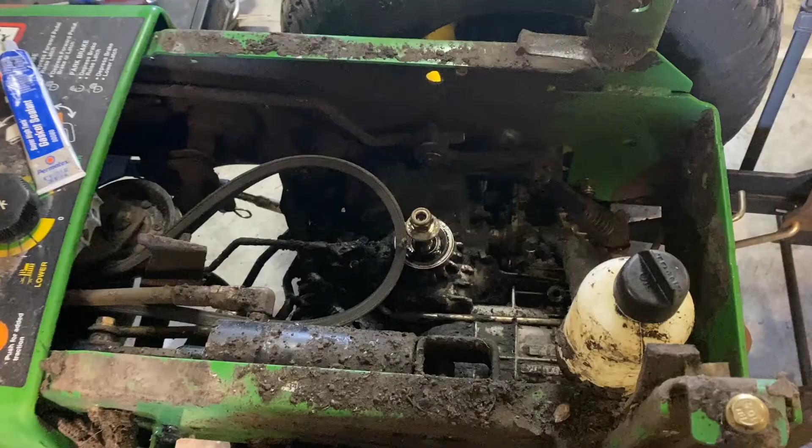Today we're working on a GX345. We did a service on this 345, including a new filter here, as well as the filter down there. We got them covered in sawdust now, but here's the old filters we took out. And when we went to fill up the reservoir, boy, it started leaking everywhere. And what we found was that this seal here on top had failed.

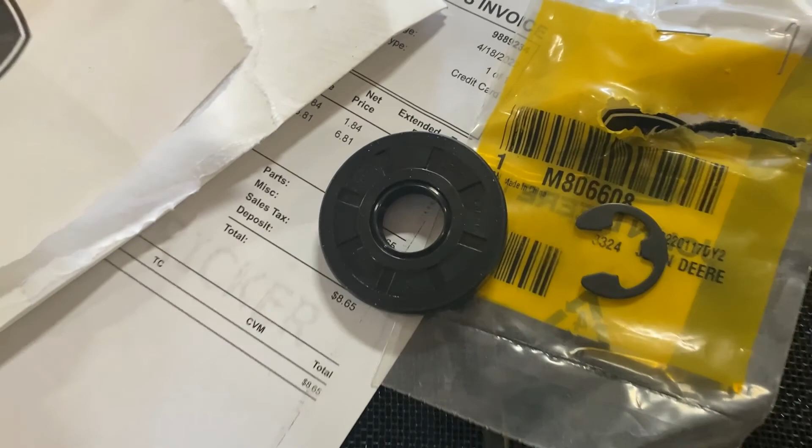So we're gonna replace that seal. I'll show you how we go about that. What we've got here is a new seal, and it was also missing the snap ring that goes above the seal. We'll replace both of those. To remove the old seal, we're going to use an assortment of tools, and I like to use a little bit of gasket sealant around the outside of the seal whenever I put it in.

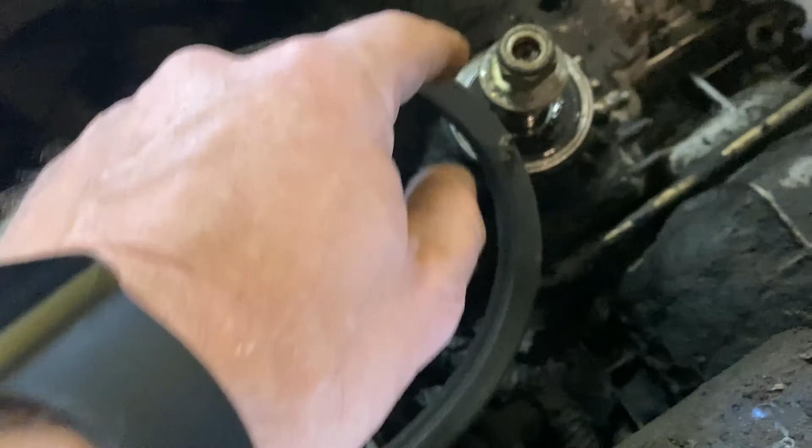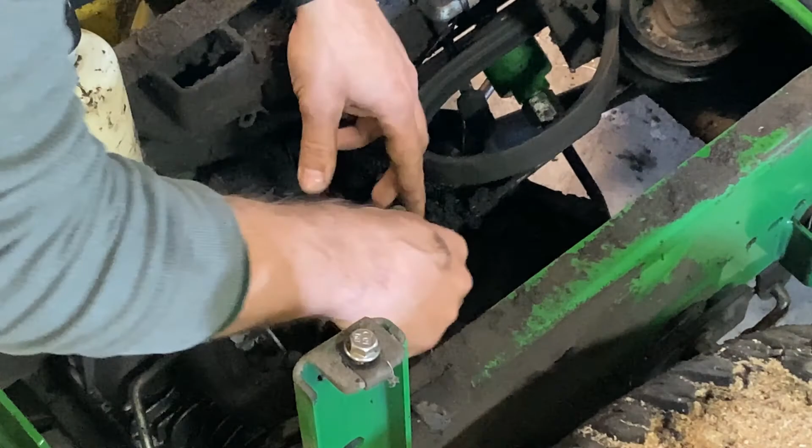Need to remove the nut and the washer. The snap ring was already missing from this one, so we don't have to worry about taking it out. There's the seal. Came out pretty easy. We've got some debris in here. We want to make sure we get all of that out. We got the spring and all that stuff. So there's that.

Everything else looks okay. I'm gonna want to take a rag and just clean all that out. I want to make this area as clean as I can before I put the new seal in.

After we get the new seal in, I'm going to pull this dude outside and power wash all this gunk out. Someone clearly knew that it was leaking, they kept refilling it and it kept leaking out. There's so much residue on here. The problem with all this residue building up is that we've got these fins. You see these fins on these transmissions like this.

What they're designed for is to increase the amount of surface area that the transmission can cool down from. So whenever you cover up all these fins, they get all filled with gunk. The transmission isn't able to cool as effectively. Same goes with an air-cooled engine or anything like that. So it's good to keep your transmission clean on the outside, even though it is just a lawnmower.

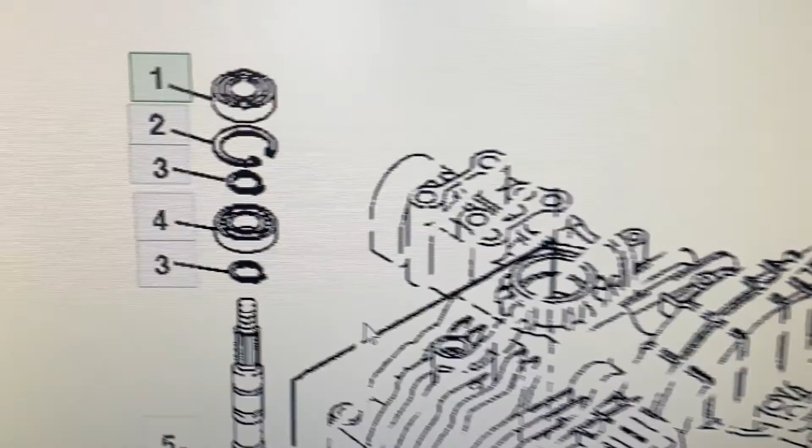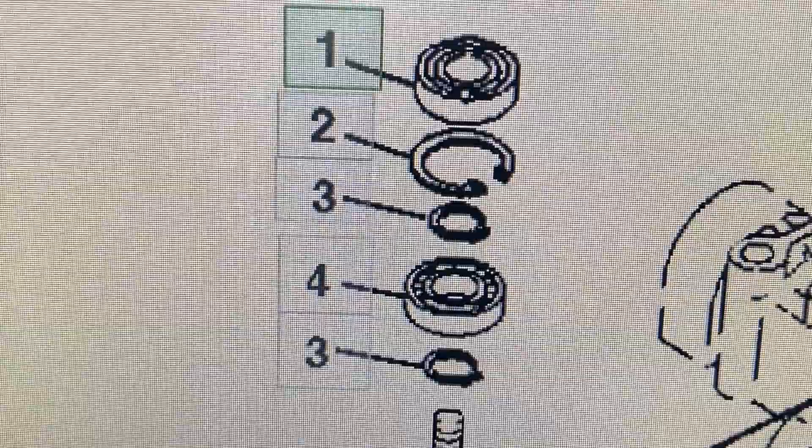All right, we've got that cleaned up. I'm going to double check everything before we put the new seal in. John Deere has a handy website that you can use to check to see everything that you need. And if we're looking at the parts catalog, this is the new seal that we ordered. This ring is already in there, this ring is already in there, the bearing is already in there, and that ring is already in there. So we need to put this seal on, which we'll do.

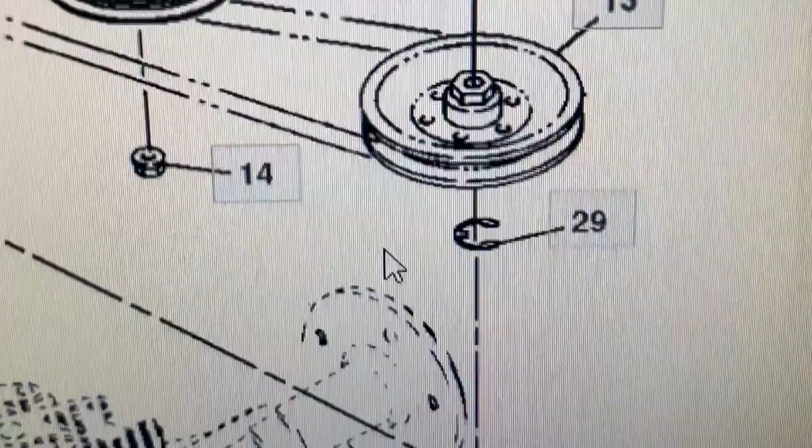And then if we take a look at another page here, we can see that there's an additional snap ring which was missing here. We're going to put that snap ring in before we put the pulley and fan back on. All right, here's the shaft. The shaft splines look fine, maybe a little worn.

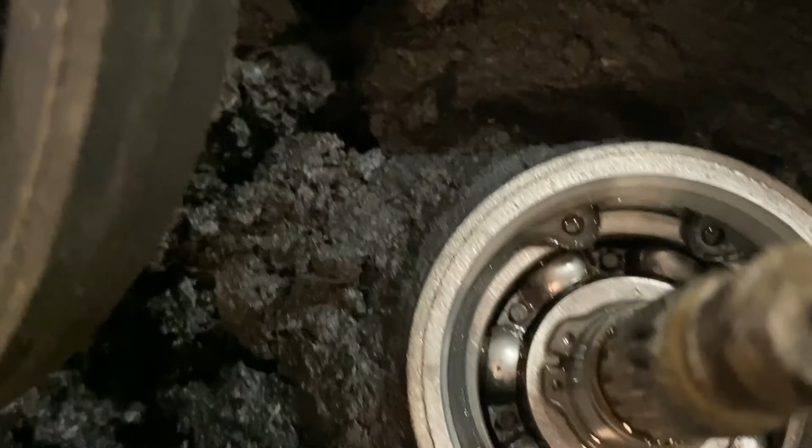Like I said, we've got the ring already installed down there, as well as the big ring holding the bearing in. So the next thing that goes on is the new seal. The new seal will slide right down over that. I'm going to put a little bit of sealant around first, and then there's a snap ring that goes into place right there, right in that groove once the seal is in. That was missing from this, so we didn't have to take that out, but we'll put that in.

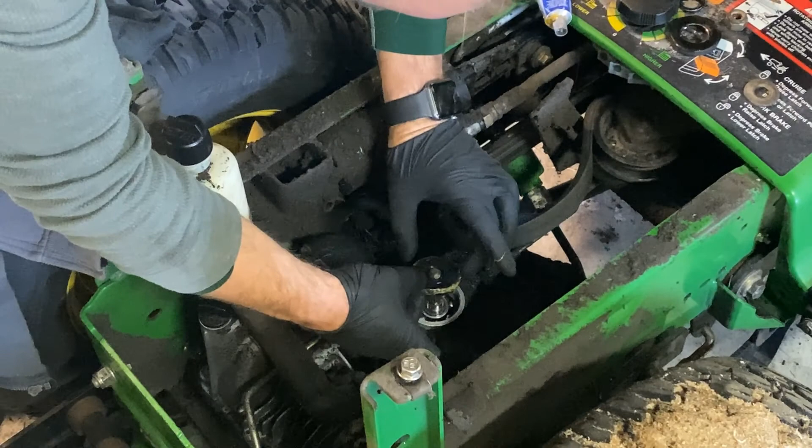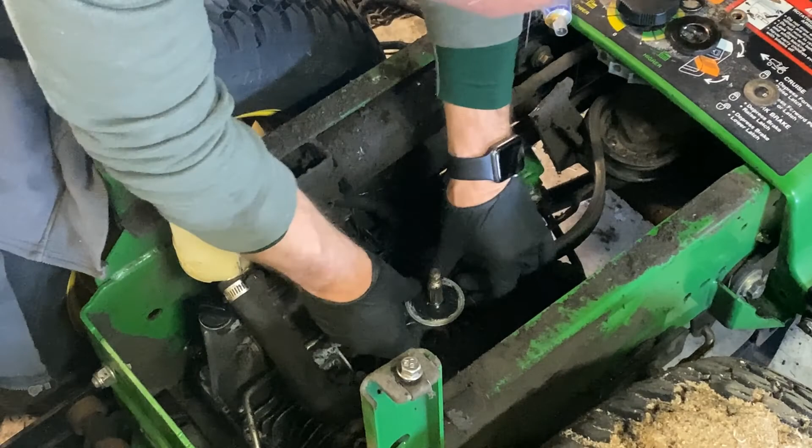Push that down in there. Should be able to see how far it goes down. They don't always necessarily have to be shoved in as far as they can go. Sometimes it's just to be flush with the outside. So that's all that we're going to do on this one, is make it flush to the outside. Be on our way. Heading out.

All right, so I looked at another transaxle that we happen to have, and it actually had this snap ring, and so the pulley was just tightened down on that. We're going to put this snap ring in here so that whenever the pulley gets tightened down, it gets tightened down onto that snap ring like it should, instead of getting tightened down on something else.

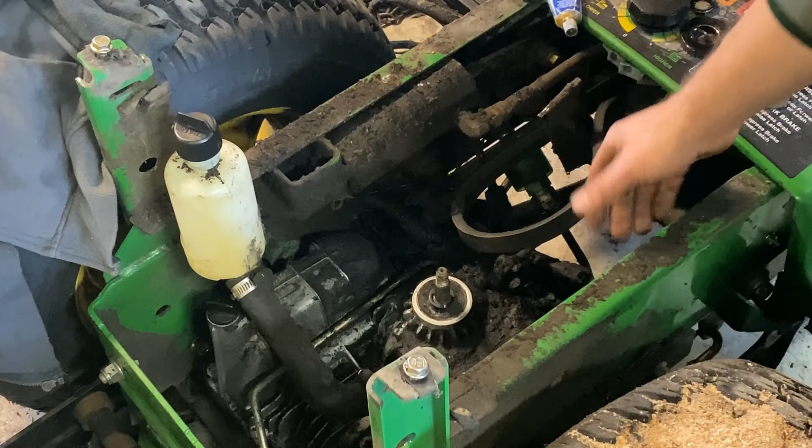So we're going to let that sit, let the gasket sealant set up for just a little bit. We're going to power wash all of this and then put the pulley and fan back on, get all this put back together. But that's all it takes to replace one of these top seals. It's really not too bad of a job at all. There's more seals on this, including a seal here.

This is your neutral rod lever. There's also seals on either axle. There's a seal. This one happens to have differential lock, so there's a seal on it. And then there's a seal on this side as well. We know that this seal was leaking, so that's the only one we replaced at this time. If you're experiencing leaks, it could also be from where your hydraulic reservoir attaches there. But once you're able to get to everything, the seals really aren't too bad to replace.